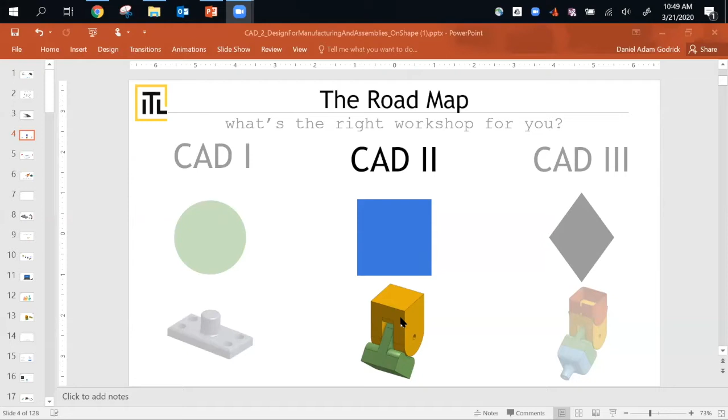The green part in our next video. We're going to put them together in our third video, and we're going to do a drawing in our fourth video. So we use OnShape.

When you know how to CAD, you know how to CAD. The tools, the shortcuts, and all that change. What you actually click on changes, but the fundamental principles are the same, whether you're using SolidWorks, OnShape, or Inventor.

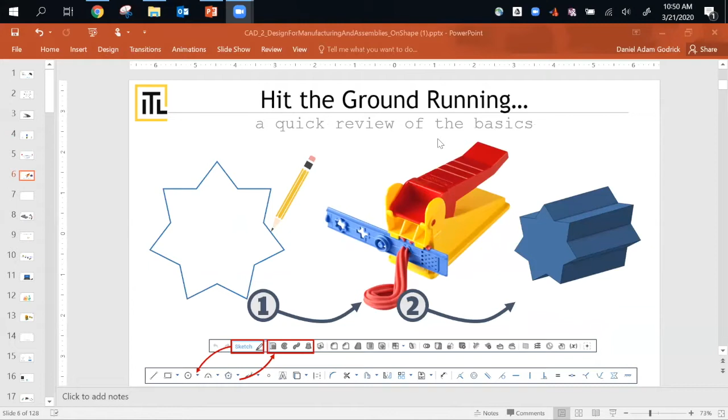Again, when we CAD, the first thing we usually do is draw a sketch. Then we extrude the sketch—think of it like Play-Doh. And then we have our parts.

Again, you can do this in a variety of different ways. When I was doing this workshop originally, I built it differently than the ITL workshop, and actually going through the ITL workshop, I learned some things, so I just thought about it differently. But there's a lot of different ways to CAD parts, and when you're CADing parts on your own, you can choose the way that works best for you.

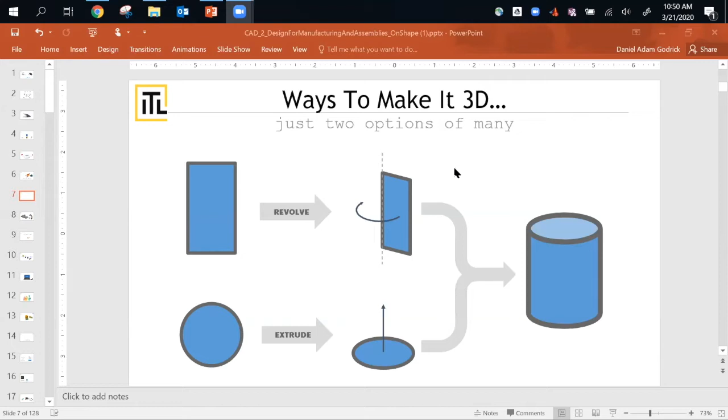Everybody should be familiar with these parts if you did the CAD workshop here at the University of Colorado Boulder. We're going to use our toolbar, and learn some new tools like the hole tools. We're going to learn some of these mates, the variables, linear patterns, and how to convert entities. Then we're going to make assemblies and convert it into drawings.

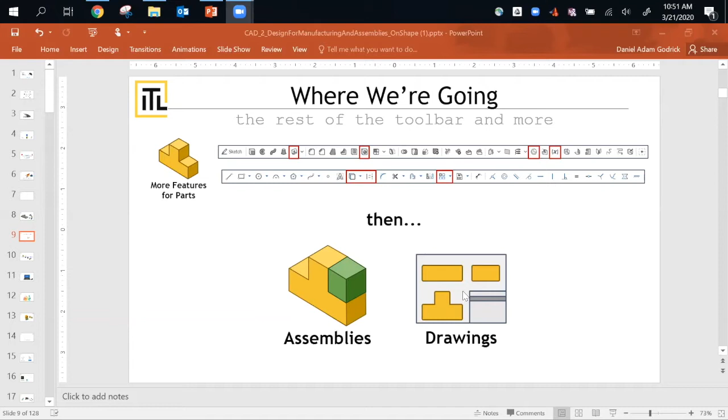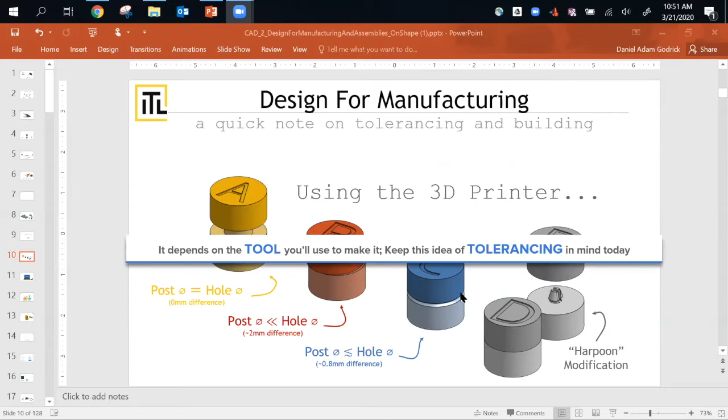So today, we need someone who's patient. I need you to be patient because I have minimal CAD experience. So I have some experience, but OnShape and I have taken a little sabbatical, and it's been a year or two since I've used this. So stick with me as I go through it.

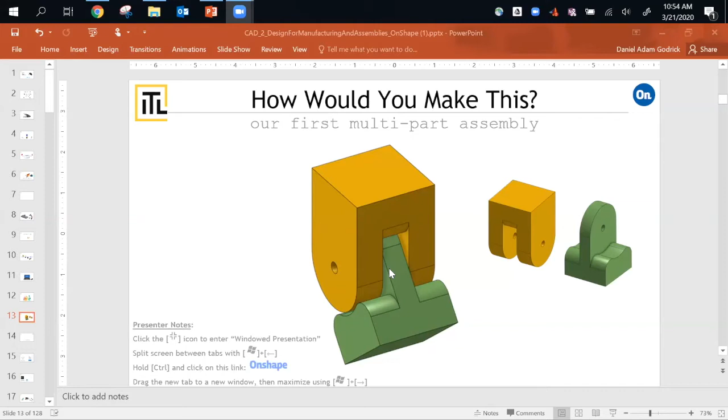So the part we're going to try to make is this one here. How would we make that? What would we do? We're going to start with the yellow piece, and we're actually going to flip it over, so we're going to make it kind of inverted from what we see here. Then we'll make the green piece, put them together, and then we'll make this drawing because that's how we would share it with a machine shop.

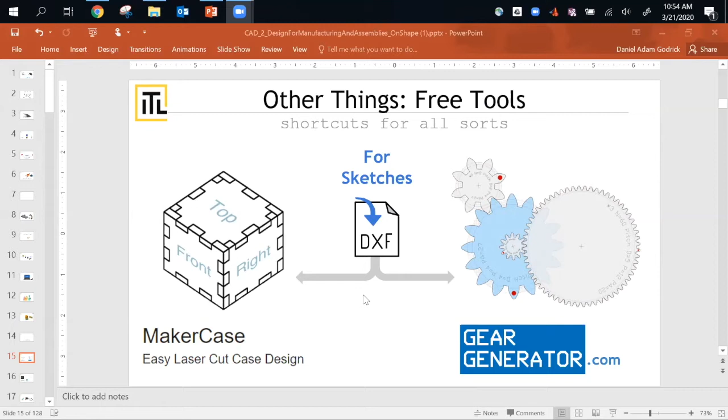Another quick thing, there's a lot of cool tools to use. One's MakerCase, and that's if you're making a box, you should 3D or laser cut it—3D printing boxes is not ideal. There's also this tool called Gear Generator, which is really useful because making gears is often difficult. As we get better at CAD, we can use other people's CADs, import it, and make our assemblies in a way that's more time efficient. We can stand on the shoulders of others.

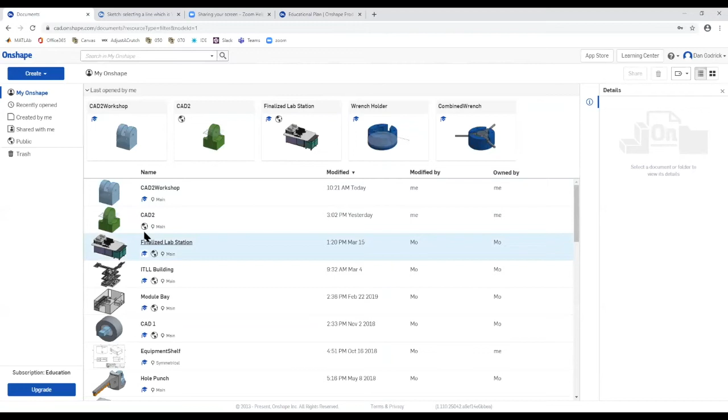So we're going to create a new document, call that CAD2 part. All right, and according to Mo, we're going to start with our top plane. So when we fire up OnShape, we have this little diagram here, or this little workspace area.

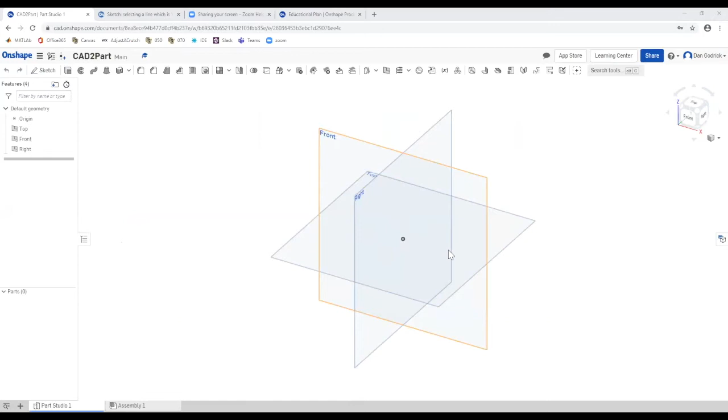We can choose a plane with which to draw on. It's often important to choose what plane, but in this case, we're just going to choose that top plane. So click on the top plane, and then click Sketch.

The first thing that we're going to sketch is just a rectangle, a 1x1 rectangle. I want to use a center point rectangle so we can stay symmetric about this origin. Click. There we go.

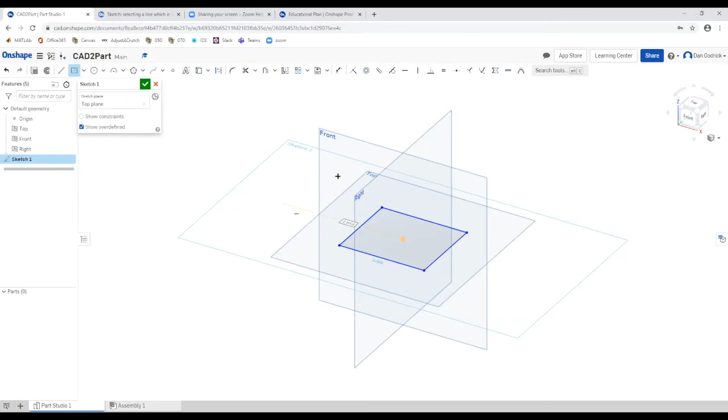If I want to get rid of the front and right, so I don't have to see them, I can hide front, I can hide right. I'm rotating around using my right mouse button, but I'm going to click on the top because I like a good orthogonal view.

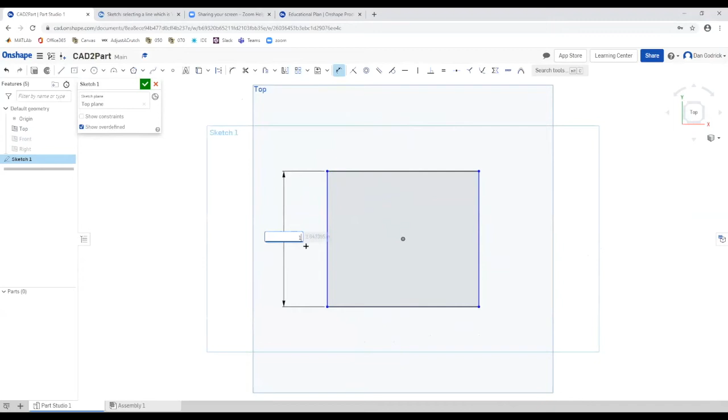Now I'm going to click, and I'm going to dimension these. Call that 1 inch, enter. And then we'll do 1 inch here, enter. Excellent. There we go. We have our 1x1 rectangle.

Our next step is to extrude this rectangle. So how do we do that? Well, we want to extrude it. That's this command right here.

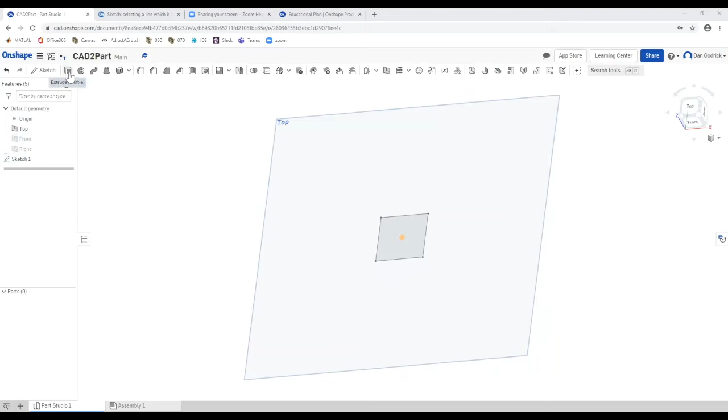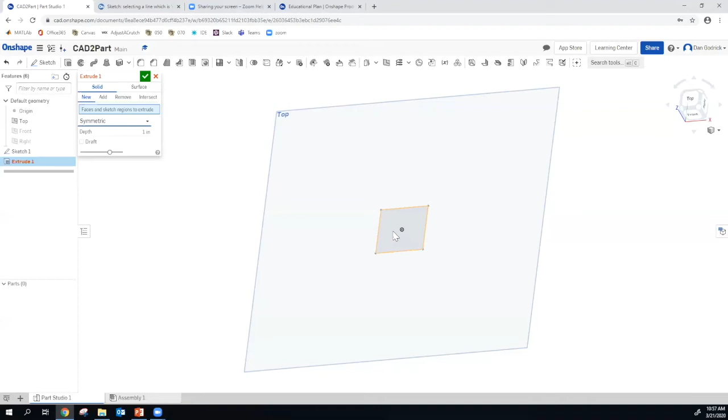So now we're going to click extrude. One of the nice things we can do is a symmetric extrude, meaning we have the same amount going up to the top and to the bottom. Right now we're not actually extruding anything. We have a depth of 1, but it looks like we have to select faces and sketch regions. So I'll select those. There we go. Now we have our first cube.

Now on top of the cube, what we'll want to do is make a cylinder region. We want to have a cylinder added to both the left and right side and a cylinder subtracted from the middle. How do you do that? There's a variety of different ways. You can draw a half cylinder and extrude it in this direction, but the way that I thought about it, and the way they walk through in the workshop, is to just draw some rectangles and revolve those rectangles.

So let's do that. We have a good extrude 1. I'm going to click sketch, and on top here, my sketch plane is going to be the top face, so I'm going to click on that. Before I do anything more, I want to kind of give myself some boundaries.

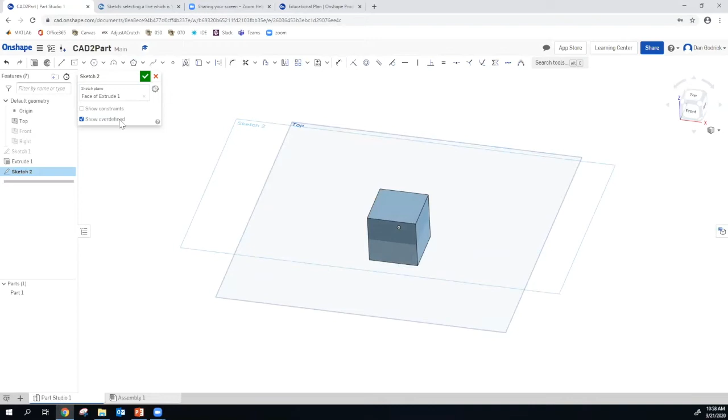I don't want the boundaries to be revolved or anything like that, so I'm going to make them this thing called construction. Construction is just there to help us. I click construction, and then I want the 2 dimensions of this face to be on my new sketch. So that is use project convert, which projects what is on this face onto my new sketch.

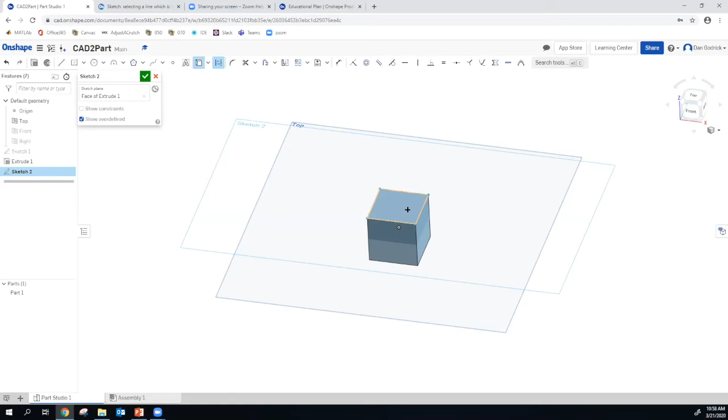I'm going to click that, and then I'm going to click the face, and you can see now I have a sketch of a rectangle, or a square, because it's a 1x1 rectangle, from that face. Cool. Now I want to turn off my construction, because now let's just get orthogonal.

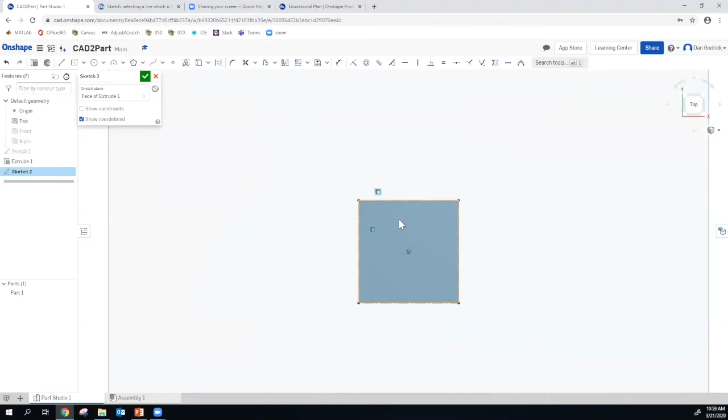Now I want to draw some rectangles on this thing. So how do I do that? Well, now let's not use center point rectangles, let's use corner rectangles. Here's our first one. I'm just going to throw a quick dimension on there just to keep me safe. That's 0.3. Let's just call it 0.3.

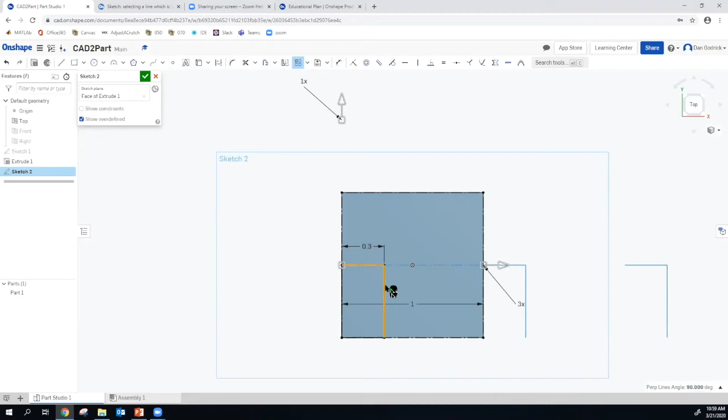Now what I want to do is use this linear pattern to draw 3 of these things. So click on linear pattern. Ooh, there's our first one. Good, there's our second one. But we have a problem clicking on our third one.

And that's because we have this construction line. So right click, do select other, and now click on the edge. Yeah, there we go. Click on the other edge. Now we're going to right click, click select other, and do the same thing, because we don't want to click on our construction line. We want to click on our rectangle.

Oh, I don't want that. Control Z. Oops. Got to try it again. All right, here we go.

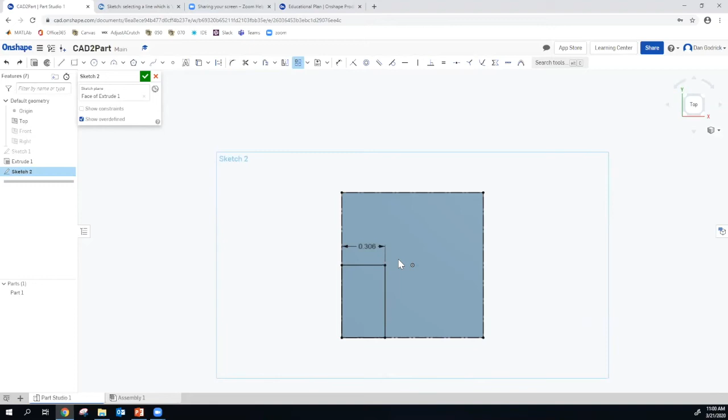Linear pattern. I want that one. I want that one. I right click to select other, make sure it's the right thing highlighted. Right click to select other, make sure it's the right thing highlighted. Sweet. And then to accept it, you can see my mouse has a check mark on the left mouse button. We're going to do that.

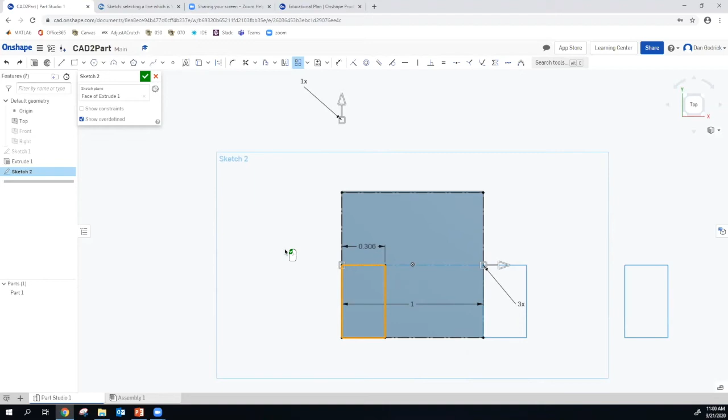There we go. So now I don't want this rectangle on the edge here, I want it next to my first rectangle. So the first thing I have to do is delete this one. Delete sketch entity. And now I can move this over to here.

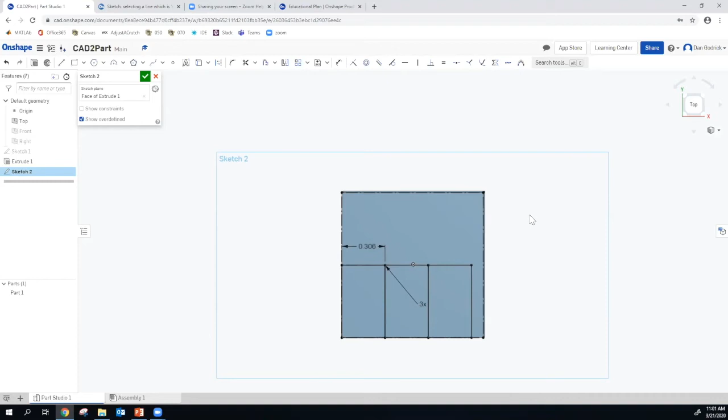Boom. Done. Okay, so it's not perfect, but stay with me. We'll make it perfect, okay.

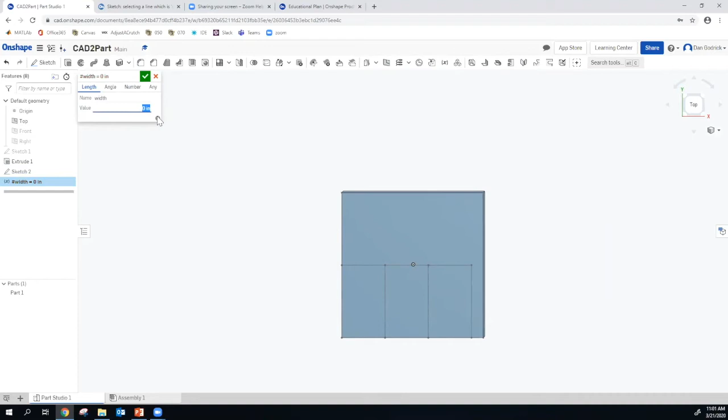So now the next thing we want to do is introduce this thing called a variable. I had a bunch of things that are either 1 inch or related to 1 inch. What I can do is create a variable, that little x thing, the x variable. So I'm going to call this the width, and I'm going to make it 1 inch.

And so now I'm going to use that. I'm going to go to sketch 1, show that, and edit sketch 1. I'll double click into that, and I'm going to type in width. The way we do that is hashtag width.

And it says it's not valid because we don't define width until after sketch 1. So I'm going to check out at sketch 1, and we can move width up to the top.

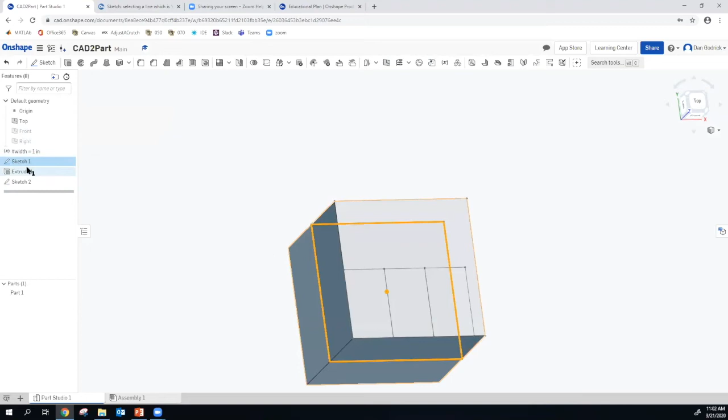And now in sketch 1, when I double click in and change that 1 to width, it should work out perfectly. Hashtag width. It tells me the value is 1, but when I double click in, it says hashtag width. Same thing. Cool. And then when I extrude, I want my depth to be hashtag width.

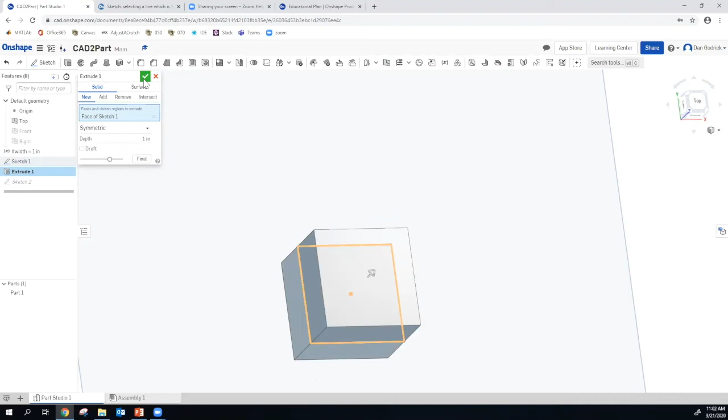And now for my sketch 2, instead of 0.3, I can do hashtag width divided by 3. And it fits perfectly.

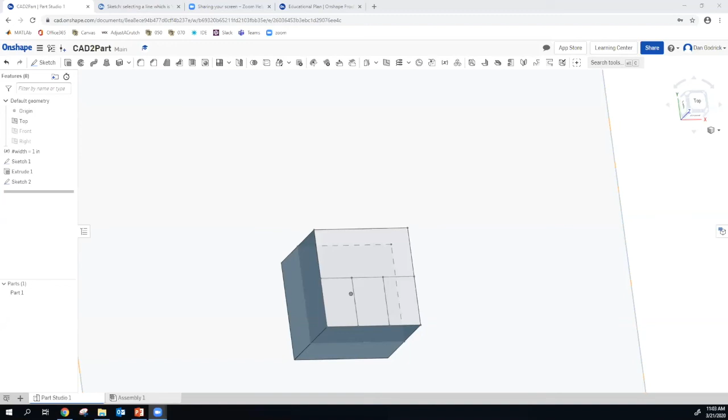And so now we want to make our cylinders. So our first cylinders that we want to make, we're going to make them and add to our cube here. So how do we make them? Well, we revolve. We click on our revolve here up at the top. Revolve, you see where I'm clicking?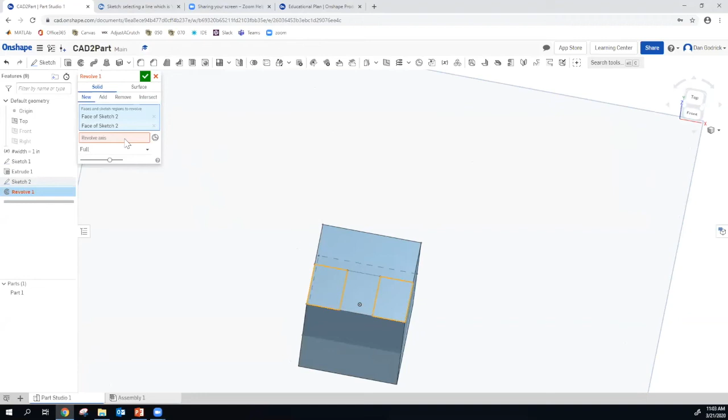And now it says select my face. I want to select that face, the right face. Now I want to select the revolve axis to be this middle area. Full revolve, yeah. Oh, it gives me a little preview. Yeah, that looks good. Cool. So that's our revolve 1.

Nothing to it. So now the only thing is make sure you can select that middle revolve axis, and if not, right click and do select other.

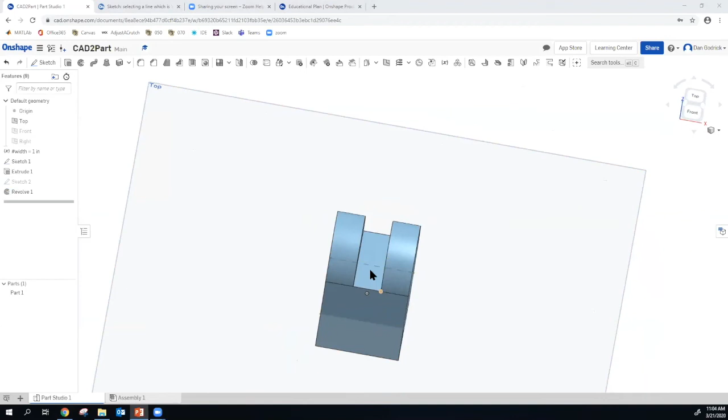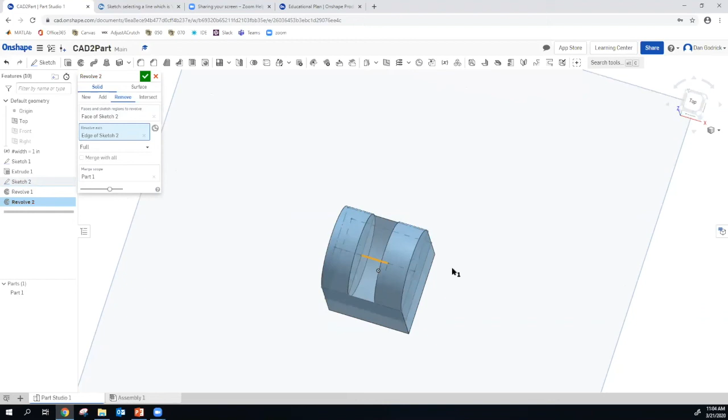So now we got to take some pieces out of the middle. We do the same thing, revolve, except we remove. And what we're going to choose here, our sketch 2 got hidden, so I'm going to show sketch 2. I want the face of sketch 2 revolved around the edge of sketch 2. There we go. And you can see it's taking pieces out. All right, should be good so far.

So now we have our part. We're looking good. Okay, so now the next thing we need to do is draw our hole. Let's draw a hole.

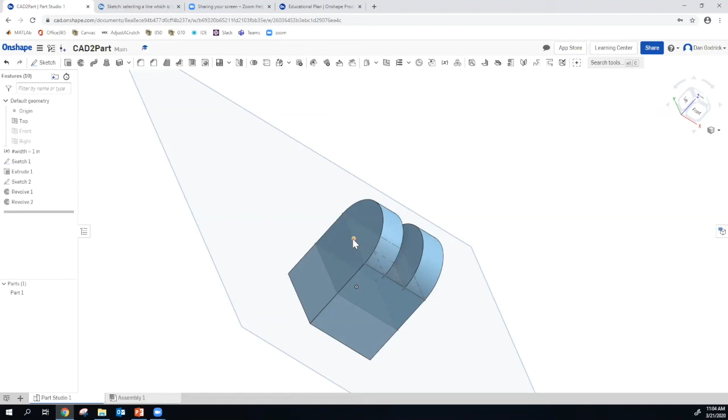So now we go around and we want our hole to be right here, right on that point. So what we need to do is put a point there. Let's make another sketch. Let's see if I click that. Yeah, there we go. So I can use this cube to help me pick points.

And so I do a sketch. I want my sketch plane to be on this left side here. And I do want to do another convert entities, but again, I want to give myself some construction lines. I don't want this to be something that just revolves or anything like that. I just want to use it to help me draw a sketch.

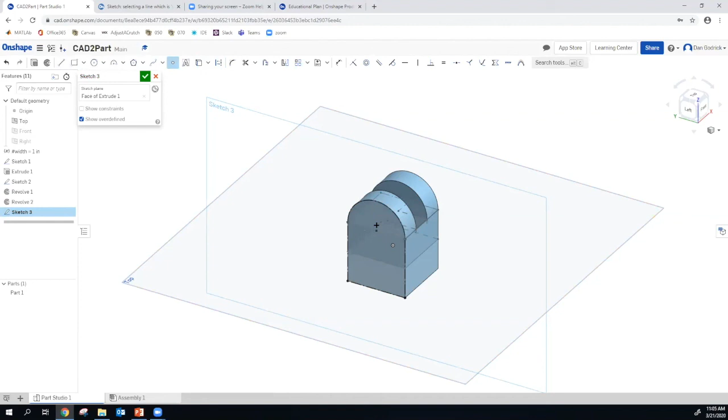So I'm going to click on that. There we go, construction line, dash line, good to go. And now I want to put a point right there in the middle. So I come up here to point, done. All right, so now I have a point there, I can make a hole.

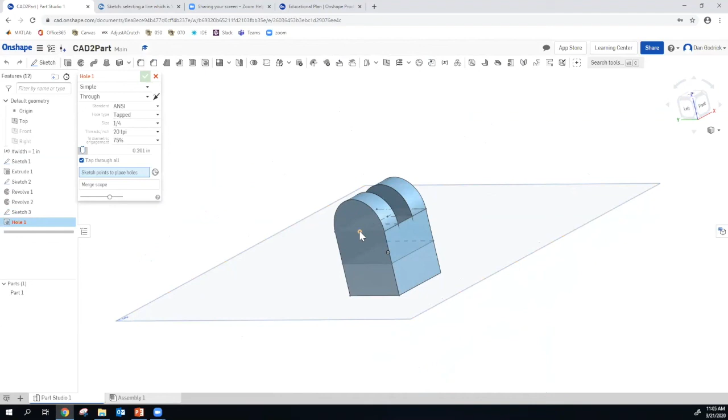And what type of hole, you probably are asking? The hole, as defined, is ANSI tapped. So I'm going to go to my hole maker, which is this right here, hole. I click on that point I just made. Oh, it makes a little hole. So I want an ANSI tapped 1/4 inch, 20 TPI with 75% diametric engagement. And it tells me it's 0.201 diameter.

There we go, that's it. That's our part. Cool, I click check, and looks like we have a part.

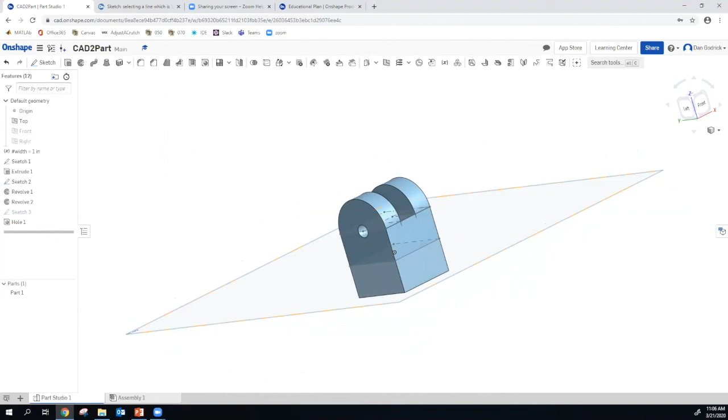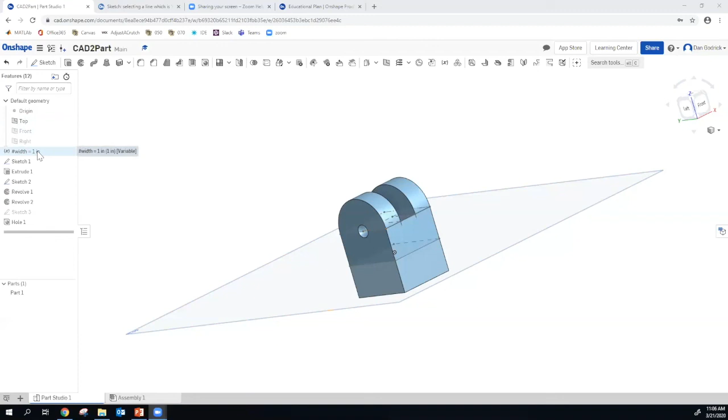And watch, we can change the variable to 2, and it will automatically propagate all throughout. Ah, there we go, look at that. And now our parts look similar. Our first part is done.